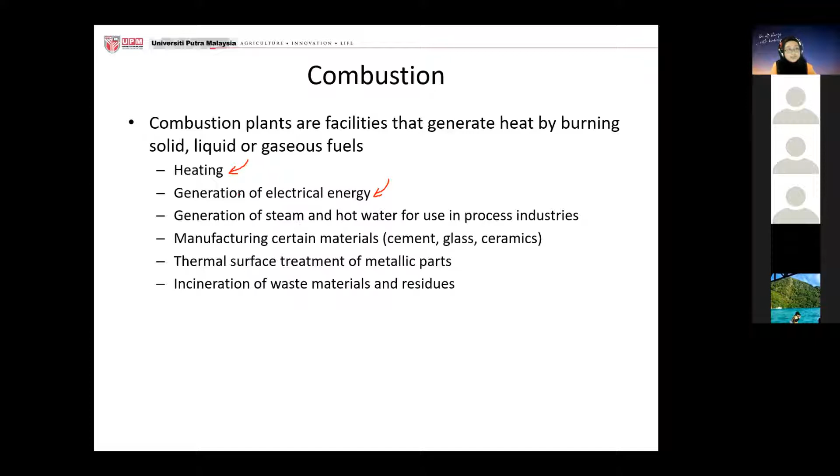And if you have something like waste-to-energy plants, you can use that combustion process and capture the energy, and that energy can be used to power up other processes. It's sort of like a circular economy in practice. I'm sure you've heard a lot about circular economy; people have been talking about that a lot. So that's where things fit in sometimes.

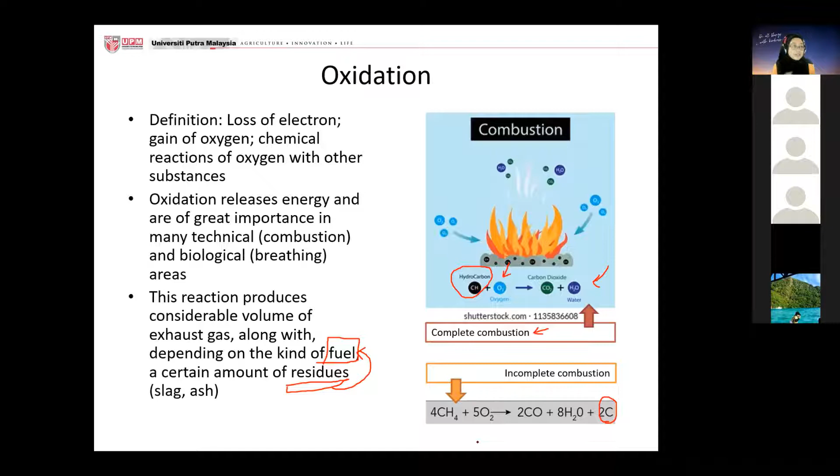So just a little bit more on combustion. In real processes, you have the stoichiometry. Remember just now with this one? This is the stoichiometry. So you can basically calculate how much oxygen you need for a process to proceed in complete combustion. I hope you guys can extract that. But that works on a very small scale. For example, if you want to combust something in the lab with a very limited amount, that's usually sufficient. But imagine you now have a power plant.

It's a very, very big power plant. You are dealing with a lot of materials, not in kgs anymore, this is in tons per second. So usually the ideal volume from the stoichiometry calculation is not sufficient for complete burning, because there's always going to be the problem of mixing. When you go bigger, mixing is always a problem, and insufficient mixing will make the process less efficient than you expected. So the combustion process must be supplied with excess air.

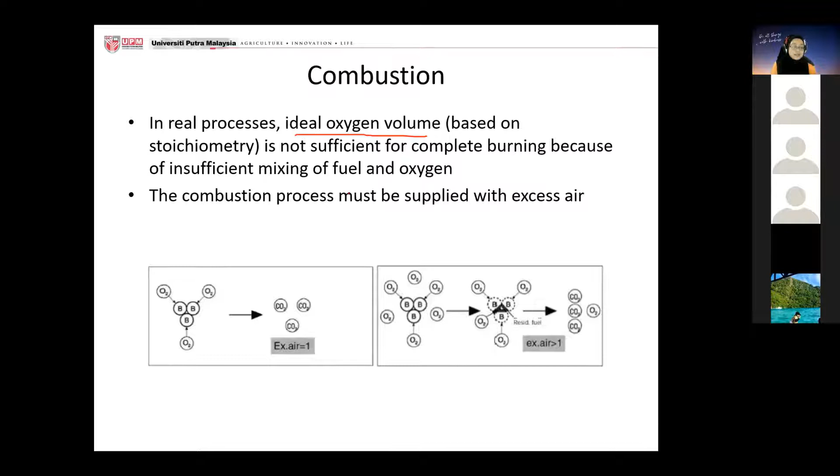Because remember, combustion uses oxygen, and especially for very big scale processes, you don't really use pure oxygen. Why? Because it's expensive. It's easier to just use air. So that's why it must be supplied with excess air. Imagine you already supply the combustion process with air. Thinking of the combustion process as a system, what comes in equals what comes out. So as you increase what comes in, your product increases. You may get more electricity, but you will also get more waste, because you are increasing the volume.

So there are three situations: an ideal situation, too high an amount of excess air, and too little. If the excess air volume is too high, the combustion temperature is reduced and you actually lose energy. Whereas if the excess air is too little, not all of your fuel is combusted, and you will have unburned fuel, further reducing the effectiveness of your combustion process.

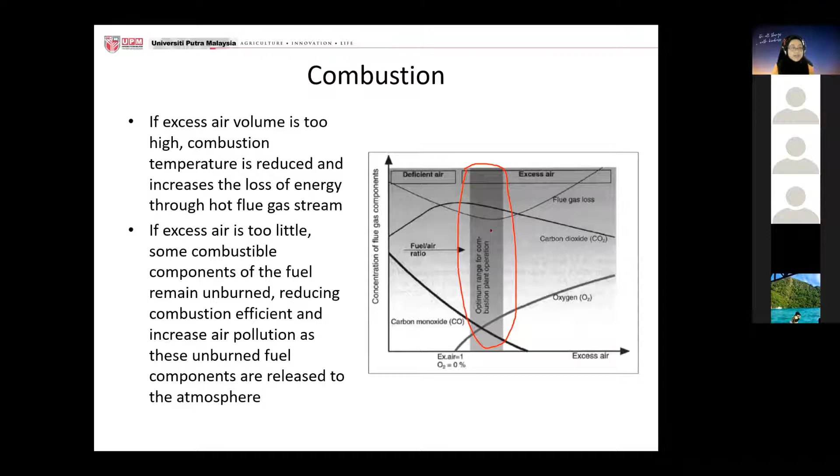So if you look at this figure, here is the region of the optimum volume of excess air. You want to be in the middle, where it's not too much and not too little. That is always the ideal situation, and that is something to be studied in more detail. It's not under your purview, but if you're interested, maybe it's worth looking into. It's enough for you to know that this situation exists.

So if you remember, I was saying just now that the composition of waste depends on the fuel. When we talk about coal-fired power plants, the fuel is definitely coal. And one of the things with coal is that its compounds or components are relative to where it comes from. For example, here you have four different places where the coal comes from, and the values are different. So you can imagine, especially when we're talking about how much ash is being produced. As you see here, ash.

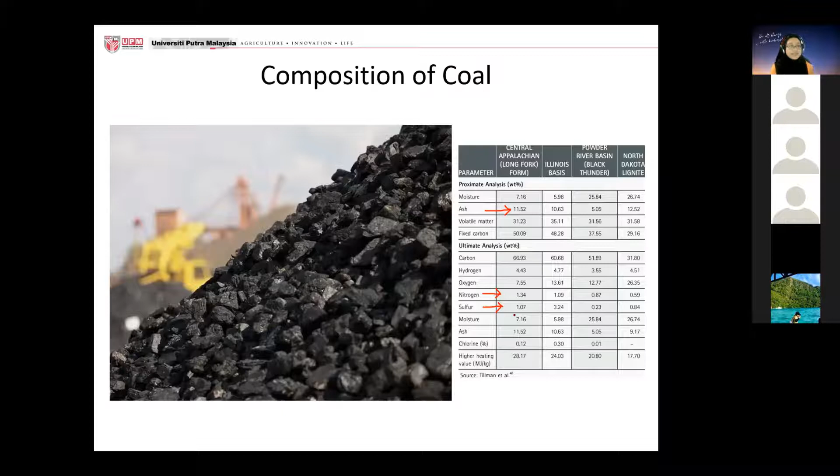And you see also something interesting here, sulfur, nitrogen. So remember, whatever is being produced at the end, the waste characteristic will always depend on the fuel, on the coal. So just keep that in mind as we go into the next few slides.

So basically, let me quickly look at this first. So basically here, you have your coal. Just now we talked about coal, right? But what comes in next is basically the boiler. So boiler, or some references also call it furnace. So here in the boiler is where the combustion process is happening.

And we come to this bit. So imagine you have your boiler here. You put in your coal, you put in your air. And then from here already you can see a few types of waste being produced. So as the combustion happens, remember just now we were talking about the possibility of having unburned fuel, and or the residues that remain after the combustion process.

So first things first, we see here is the bottom ash and boiler slag. So this is the boiler, and usually they are called dry bottom boilers. These bottom boilers are usually used in the power plants. That's why you have this bottom ash. So bottom ash is when the coal is burned, the unburned material contains around 80% fly ash and 20% bottom ash. And bottom ash looks like this. It's a dark gray, granular, porous, predominantly sand-sized material.

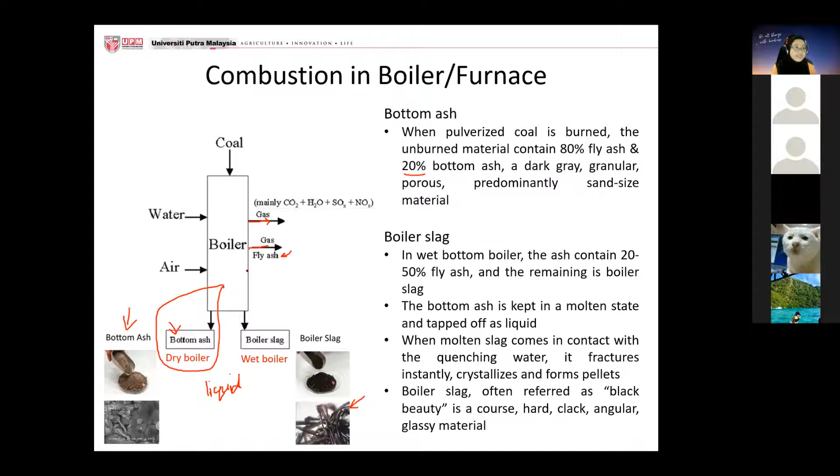But if you see here, that's fly ash. And fly ash is basically the most being produced. And of course, remember last week I talked about flue gas. So this figure splits these two. It has gas here and another outlet saying gas and fly ash. But in real life, there's only one, both mixed together. But I just want to show you what happens next. Remember, whatever comes out of the boiler is called flue gas, I mean the gas portion. So you have this gas and fly ash.

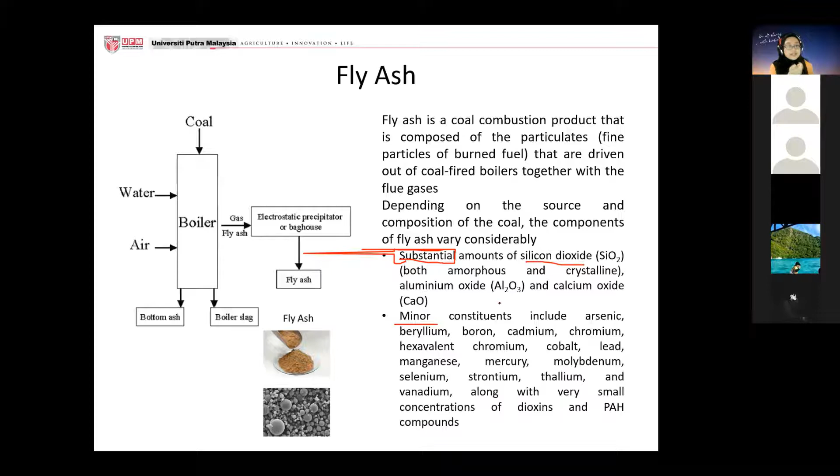It goes into here, the electrostatic precipitator or baghouse. So what happens here is, as the combustion happens, fly ash will be formed, and it is composed of particulates, and it's driven out of the boilers together with the flue gases. And it also depends on the coal again; the components will vary. So here are the potential components. You have substantial amounts, and minor constituents. But just look first at the substantial amounts: we have silicon dioxide, aluminium oxide, and calcium oxide. So these are produced in excess.

And then also we have minor constituents. These are in trace amounts, but they usually contain toxic components. Arsenic, cadmium, chromium. There's a lot of different toxins in there, which means that you have to treat this fly ash. You cannot just release it to the environment. So in this situation, usually an electrostatic precipitator or baghouse is being used, right?

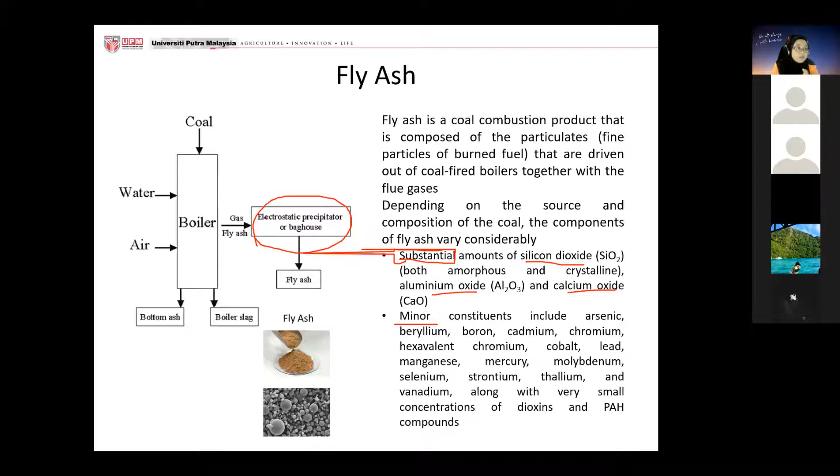So we'll just go very briefly on what are the technologies usually used here. I know that in this figure it already mentioned electrostatic precipitator and baghouse, but we'll just look at how those things work, very quickly. So first we have the centrifugal separator. Apart from the two mentioned before, this is also one potential way to treat it, and basically it's using a cyclone, right?

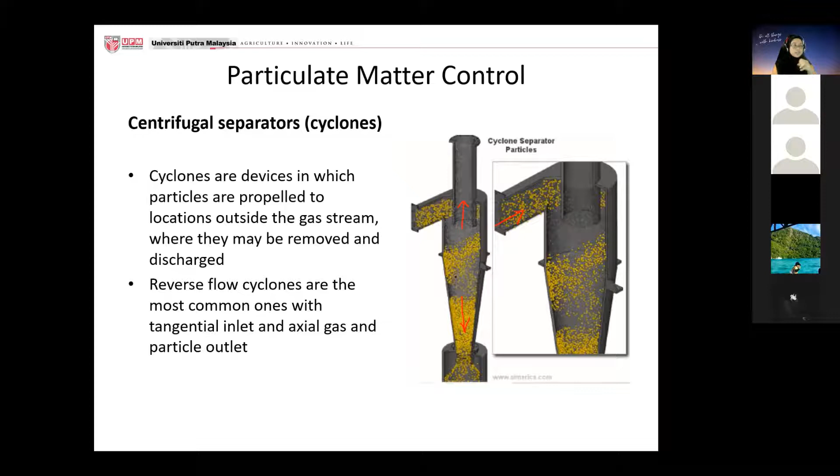So imagine you have a device which is turning. If you just Google cyclone, it can be like a whirlwind. So you can imagine it's something that is moving circularly, spinning. What happens is that the particles will be propelled to the outside of the gas stream. So the gas goes in from here, the particles will eventually go down, and the gas will go up. So that's how it separates the particulate matter, primarily fly ash, from the gas.

So apart from the cyclone, of course, we have electrostatic precipitators. Electrostatic precipitators are devices where you have an electrical field, basically. So why do people use microfiber cloth? Because it has a charge, and that's how electrostatic precipitators work. When the gas stream goes through the electrostatic precipitator, the electric field will give charges to these very, very small particulates. When they are charged, it's easy for them to be collected by an electrode. Just remember, positive and negative charges attract each other.

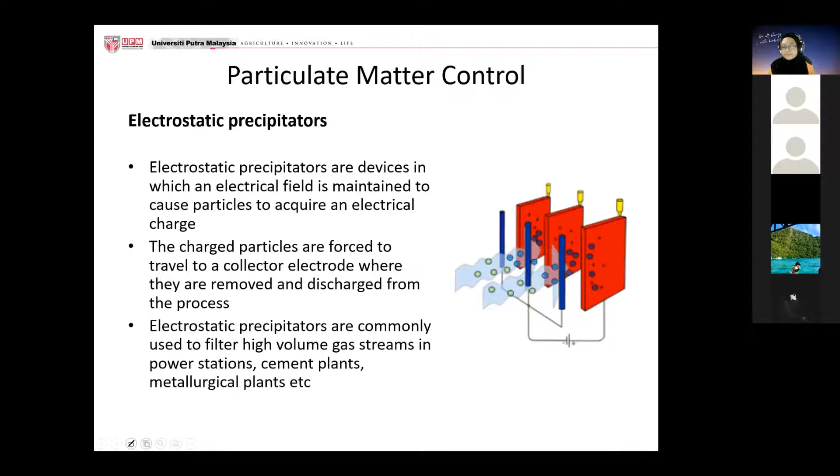So ESP is very, very widely used in power stations, and not only that, in cement plants, in metallurgical plants, etc. Whenever they have flue gases, electrostatic precipitators will usually be used. Let's go to the next one.

So the third one, we have fabric filters. Just now it mentioned baghouses. It can be that, and it can also be different forms as well. But usually it's made from fabrics, and they remove particulate matter from the gas stream by retention of the particles. So imagine you have your gas going here, and the bags have a porous structure.

Imagine your water filter. If you ever open your water filter, inside it has something that is porous. Whenever things go through, the bigger-sized ones will be collected there. It's the same principle here. It has porosity, and lastly you get your clean gas outlet. Whatever was in the gas before is retained inside, usually the particulates. This doesn't cover things that are bonded to the gases. Anything that is in gas form cannot be treated using particulate matter control.

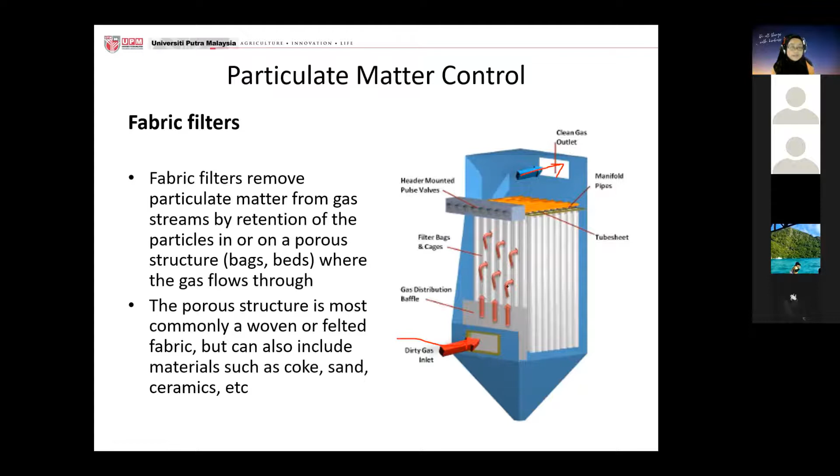Right. So that is about fly ash. But at the same time, remember we have this outlet as well, which I call flue gas. If you look in the figure, it's mainly CO2, water, SOx and NOx. So just bear with me one second.

Because I want you guys to do something. I hope you're all still there. If you check it out, you can do this. So why do we need to remove sulfur oxides from the flue gas? Why? If you're on your phone, you can do that. If you are on your computer, you can do that as well.

Come on guys, ada 2 orang. I just saw only 2 people voted now. Okay, come on, take your time. Salah tak apa kan, doktor? Tak apa. Just to make sure you are still awake. Awake. Okay, come on guys, separuh lagi ni. Lagi pun nak tengok, kadang-kadang ada yang on je kan. Right, come on, lagi 7 orang ni. It's anonymous here, so I won't know who didn't vote. So, lagi 5 orang lagi. Oh, by the way, did you see the result? Tak nampak lagi kan? Just checking. Lepas korang jawab, did you see the results as well? No. Tak, no, doktor. Okay, just checking.

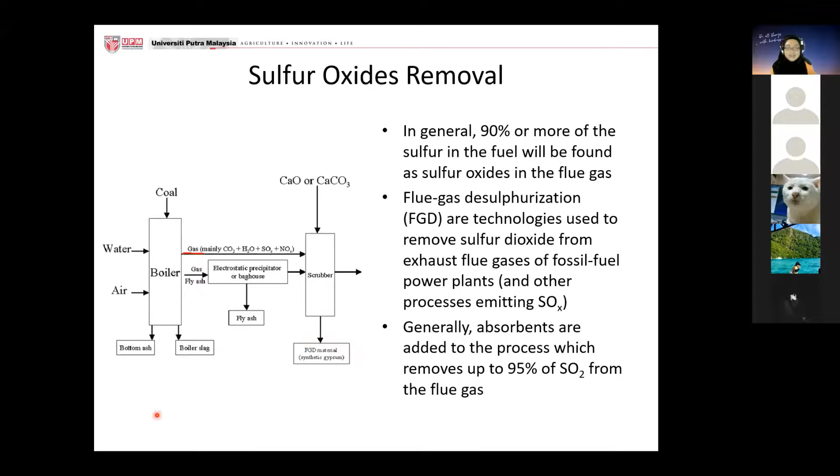So you see here, it's a scrubber. Scrubbing is one of the ways, and it's the most widely used if we're talking about FGD. Generally with scrubbing, you can remove up to 95% of SO2 from the flue gas, so it's quite an effective process. In scrubbers, imagine you have an absorbent. Usually in the wet scrubber process, you can use ammonia or sodium sulfite. But if you look here as well, CaO, people usually use lime or limestone slurry because that is quite cheap and you can get it very easily. Whatever is used, it must be effective lah. That is one of the reasons to choose between the different types of absorbents.

Basically, if you look here, the flue gas comes in, and you have your absorbents in liquid, and that is dispersed through the scrubber. Usually it goes through a sprayer lah. You look here, nampak bentuk macam tu kan. It's sprayed out, and the flue gas comes from below, and the contact between liquid and gas assists the process. What happens is that the absorbent will bind with the sulfur oxides, sulfur dioxide, and eventually you get the flue gas clean from the sulfur, from SOx.

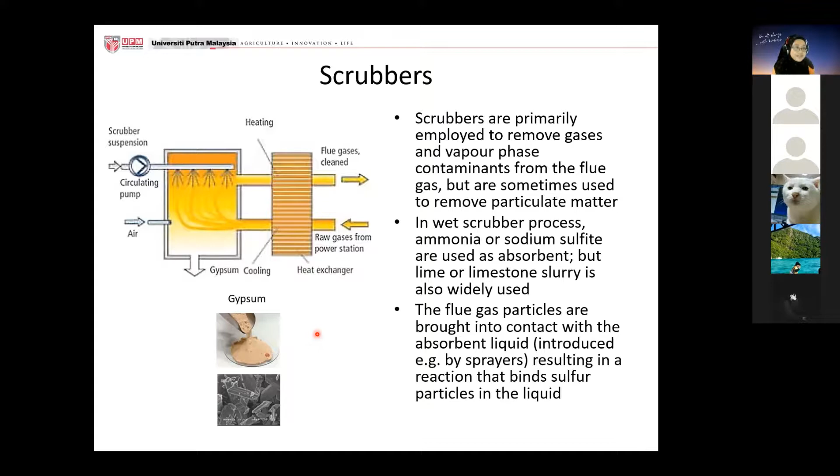And then, of course, the management of coal combustion products. What is usually used is underneath here: disposal, which is the least preferred, but also the cheapest. So you can see that a lot of the bottom ash, the boiler slag, and whatever else is produced from the ash goes to landfills or to ash lagoons.

So, for example, in the UK, currently 50 million tons is of coal ash. So coal ash here means all of them: the combination of fly ash, bottom ash, and boiler slag, collectively known as coal ash. So coal ash, 50 million tons, that's a lot. It's currently stored in landfills.

And in the US, same thing. You have 53 million tons generated in 2013. I know that is like 8 years back, but you can imagine from 53 million, only 23 million is being reused, while the remaining is sent to landfills, right? But there are differences.

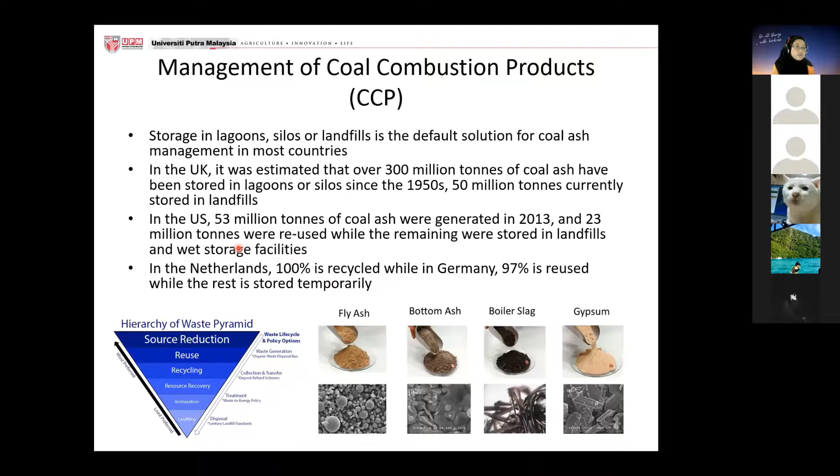We have one where the least preferred way of treatment is being used, because it's the cheapest, it's the easiest. But we also have one that's the best kind of situation, where you don't actually have the waste anymore. So in summary, just looking at this,

So just very quickly, Hg. Who knows what Hg is? Mercury? Yes, correct, mercury. Great. I forgot too the other day. So mercury, remember there is mercury in coal. Mercury is, of course, very, very toxic, right?

And usually in power plants, they use ACI, activated carbon injection. So usually after the ESP, they have reduced the fly ash. So they will inject activated carbon. The activated carbon will attract mercury, and then it goes again to the fabric filter. Then you will be able to reduce the amount of mercury in the flue gas. So that also goes to the ash pond, the mercury waste, right?